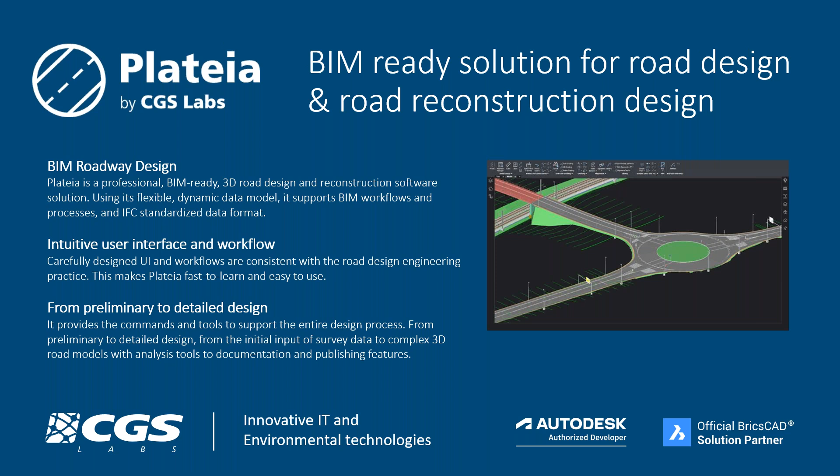If we say a few words about Plateia, which will be the focus of today's webinar, Plateia is a BIM-ready software, which means that you can add all the data you need to the design 3D model of the road, and then exchange this model using IFC data with other software in your BIM workflow. Plateia has a very intuitive user interface that is based on the established design process. And you can, as mentioned, use the software for any kind of road projects, no matter the type or size of the project.

There are several advantages of the software. Maybe let's just emphasize a few. It's a complete tool for the design, so you can design the geometry, you can do the analysis, and you can prepare all the documentation. It supports localized standards, as mentioned, and it has an established design approach, which is very common in civil engineering. So civil engineers are very fast to learn how to use Plateia.

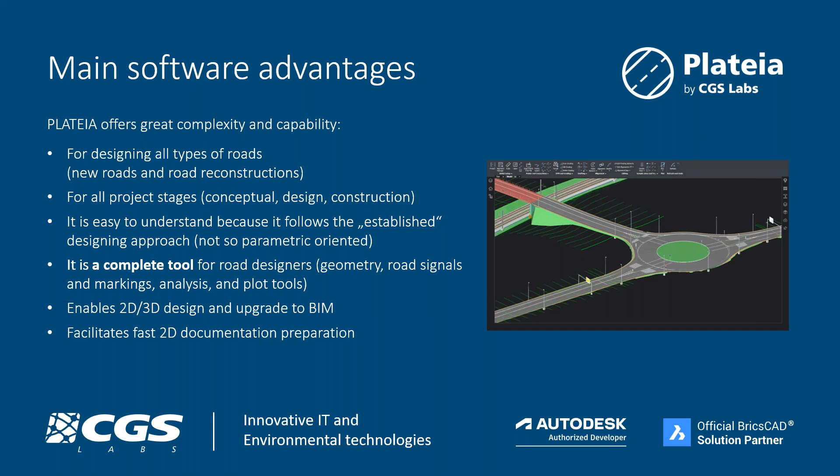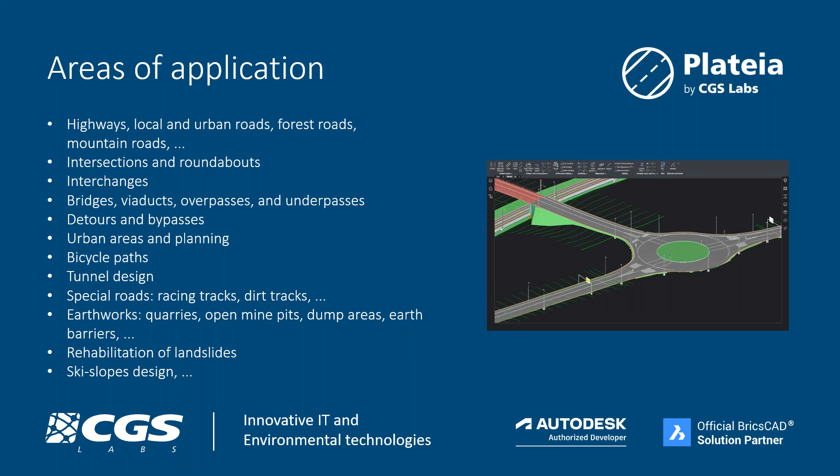It enables 2D and 3D design and also supports BIM workflows and BIM approaches, which are now used more and more in engineering practice. If we go further, you can see that areas of application of Plateia are very diverse. But today we will focus mainly on the design of intersections through the BIM perspective.

And who are the users? As mentioned, road designers are the main focus group, but Plateia is also used by surveyors who prepare the data for the designers, and also by contractors who monitor the designs and are actually involved in the construction of the actual projects.

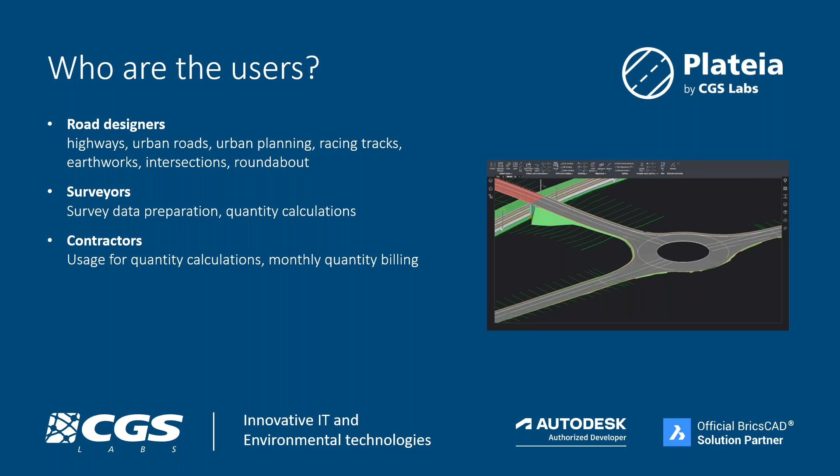So now I would like to hand over the floor to my experienced colleague Petra Tihole, who will show you how to design intersections with BIM in practice. Please, Petra, take over.

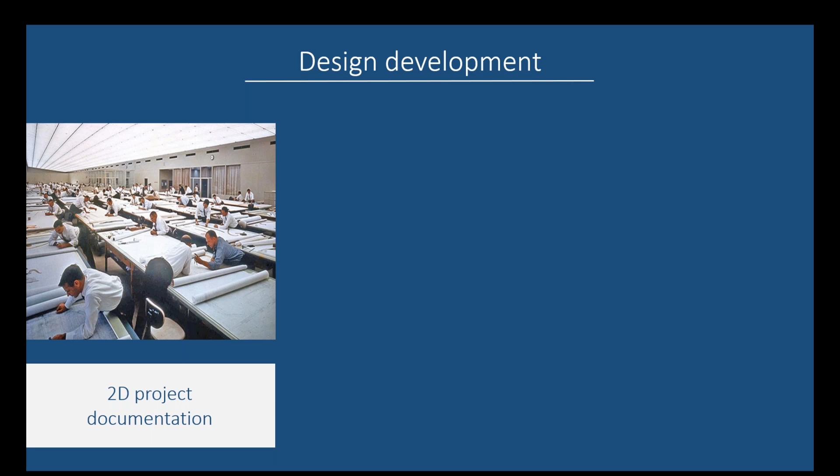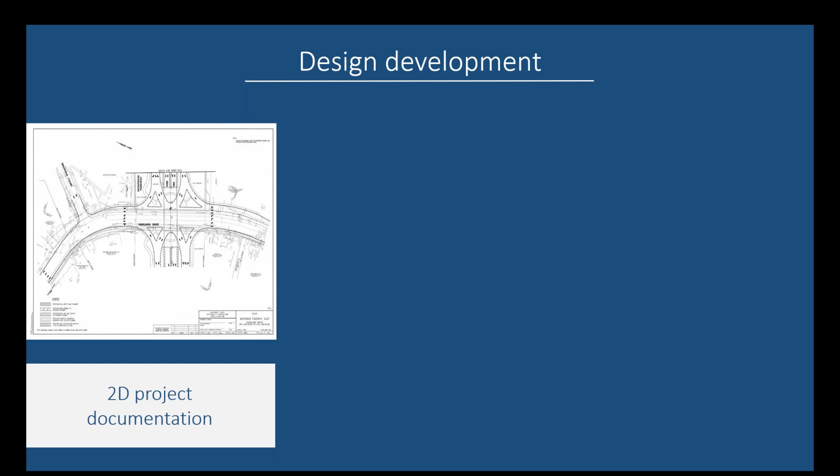Based on such cases, the idea of developing road designing software was born. The team of developers started with the aim to transfer the classic design concept from paper to computer using basic geometric elements such as lines, arcs, and circles. Such a 2D computer-aided design made it possible to significantly simplify and speed up the planning of infrastructure facilities. Later, due to the desire for even more efficient design, 3D modeling began to develop. It enables us to have a better overview of the model, which reduces the possibility of errors compared to the classic drawing of 2D plans.

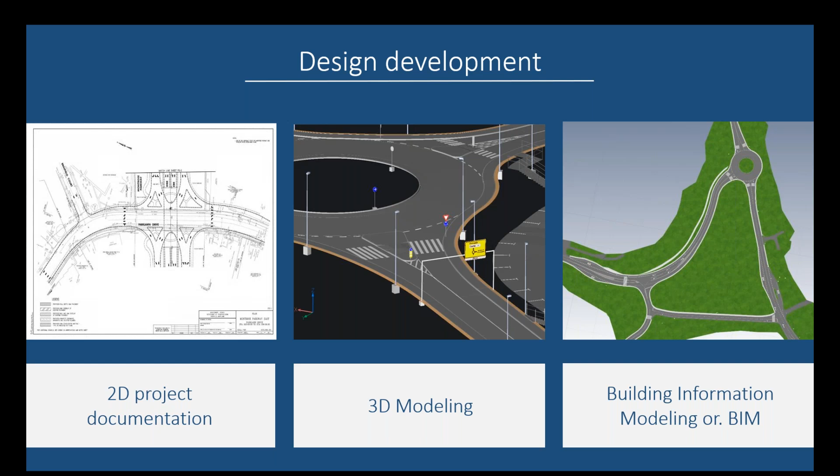In recent years, building information modeling has become established as the most successful design approach. BIM is the design concept that is no longer based only on the geometry of the models, but also on the information attached to the elements. So information is the key component that separates a BIM model from a 3D model, as it brings many advantages compared to classical design. It is getting more and more attention internationally.

CGS Labs software has enabled BIM planning for several years now. The biggest advantage of using Plateia for BIM projects is that the BIM approach is very similar to the classical design. In addition, the tools are very simple to use as the user interface is designed very carefully. This means that you don't need to learn a lot of new things and still quickly upgrade your plans into BIM models. The next advantage of using our software is the creation and editing of cross sections. In addition to many features for drawing typical cross-section elements of the road, Plateia also enables you to draw custom elements which you can planimetrify and draw as a 3D model.

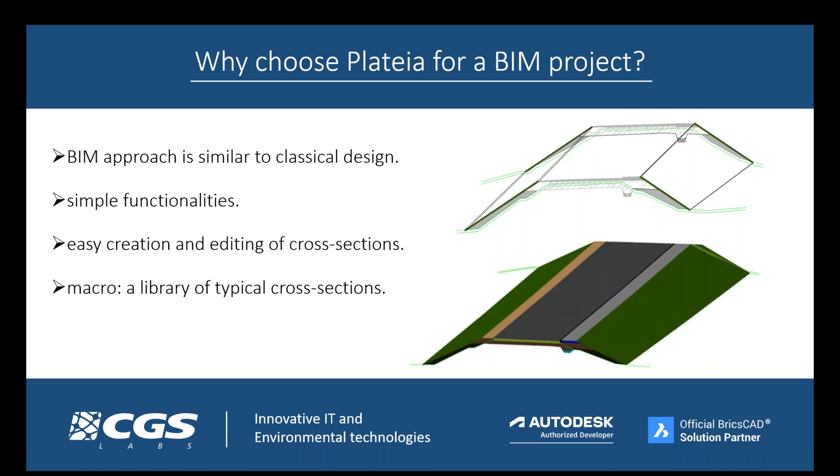So let's see what's meant by that. Plateia creates a 3D model by connecting planimetric quantities between individual cross sections. So each road element that you want to draw as a 3D solid must be drawn as a planimetric quantity in cross sections. This means that with features from the cross-section tab, you can draw and planimetrify a custom complex shape, which can then be drawn as a 3D solid. And you are not limited by typical elements from libraries as you are in other programs. Speaking of cross sections, I would also like to mention our macro. This tool allows you to save any cross section to a library and reuse it on another project.

And when it comes to special functionalities for BIM projects, we must highlight the collision detection tool. With standard programs, you usually have to export IFC first and then check for collisions in some other environment, while in Plateia, you can do this directly within the software. And when collaborating with other experts in demanding projects, tools for attaching attributes and IFC export and import will back you up without limitations. For all these reasons, Plateia is popular among civil engineers that work on BIM projects.

To further improve the BIM approach, we often set up demo projects to test the capabilities of the Plateia and Ferrovia software. On the basis of these projects, we can search for improvement possibilities based on the upgrade of the existing ones and on the development of new functionalities. At all times, our focus is to maintain the designing process as it is, simple and clear, as we want to avoid any unnecessary stress.

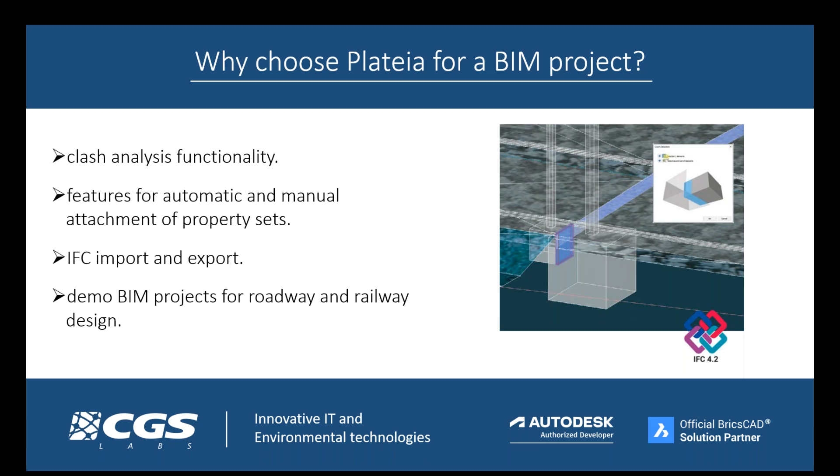Through 5 key steps, I will teach you today how to create a BIM model of an intersection and show you how to create 3D models of islands and traffic signaling. Finally, I will explain the advantages of exporting a model to IFC and what you should pay attention to when

designing a roundabout. In doing so, I will use the existing commands and I will also include some new functionalities that we have developed in the last year. This can help you work even faster and have more options available. I will also show you how to attach property sets of attributes to elements, and what is important when defining them so that you can then correctly connect the models to the quantity takeoff.

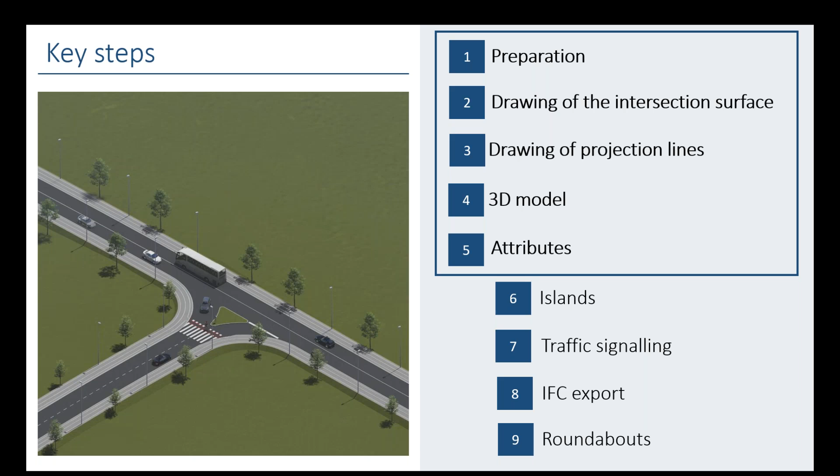Now let's start with the design of a three-way BIM intersection. The first step of creating an intersection is preparation. By that, I mean inserting terrain, creating two alignments that intersect, defining sample lines, drawing a profile, and calculating superelevation. This step is always the same, no matter if you are creating 2D plans or a BIM model.

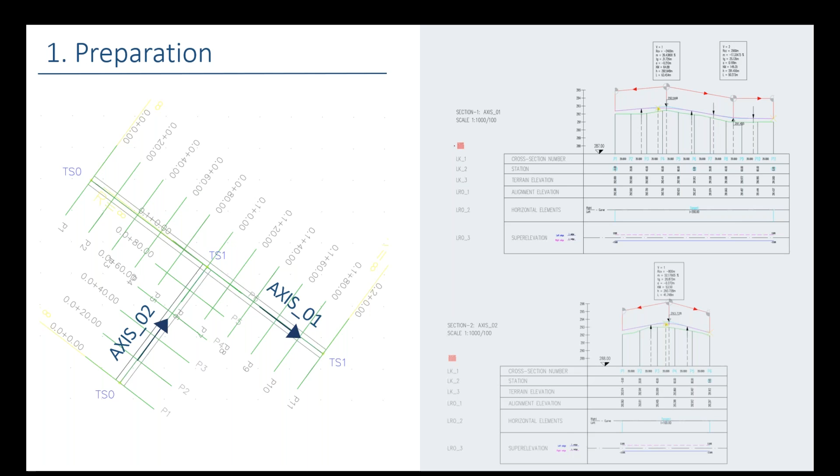In this example, the major alignment is axis 1 and runs in this direction, while axis 2 represents the minor alignment. After that, we move to the second step, which is creating an intersection surface. We do this with a dedicated tool found in the Traffic tab.

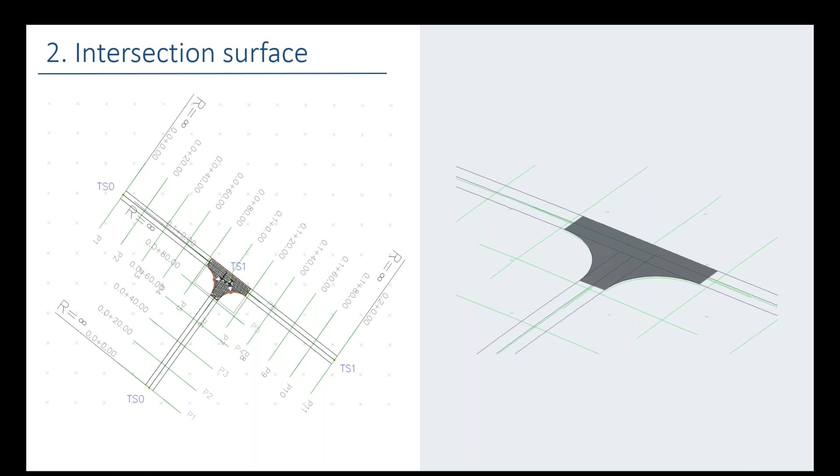This functionality significantly accelerates the intersection design process with automatic adjustments of the slope and superelevation of the minor alignment according to the major alignment. Besides, the alignments of the fillets and their longitudinal profiles are drawn automatically. Okay, to run the command, click on the Traffic tab and then double-click on the intersection.

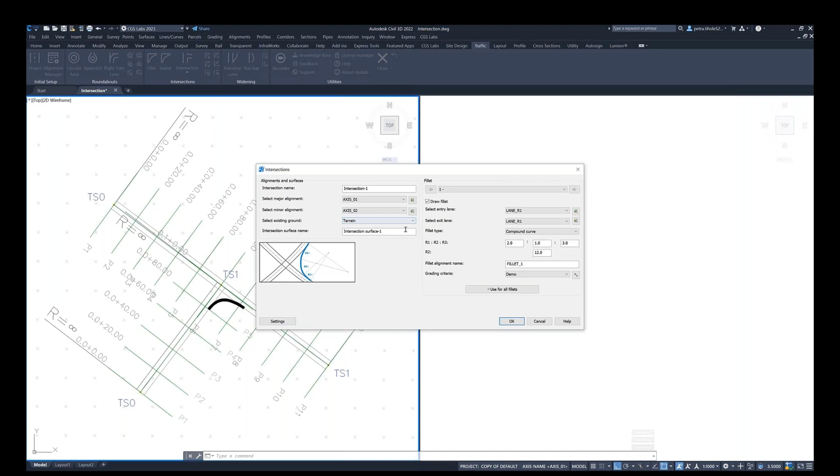First, define the parameters in the left part of the dialog box. Type the name of the intersection and then select major and minor alignment from the drop-down menu. Then select the existing ground, the existing terrain, and define the intersection surface name. After that, specify parameters for individual fillets.

This tool always offers to draw 4 fillets. Since we want to create a three-way intersection in our case, we will exclude 2 of them. We can also help ourselves with a sketch. If the fillet is possible, the software automatically shows it in the layout. So let's define the parameters of the right fillet.

First, check whether the software set the right entry and exit lane. In this case, everything is okay. Otherwise, we would select different lanes from the drop-down menu or directly in the drawing. Then select the fillet type. The user has 3 options. We will select the arc option and we will define the radius.

After that, we have to define the fillet alignment name. In this example, we will name it after the side. However, for larger projects, be careful to name the fillets in a meaningful way because it will be easier for you. After that, you select the grading criteria and then press the arrow to move to the next fillet.

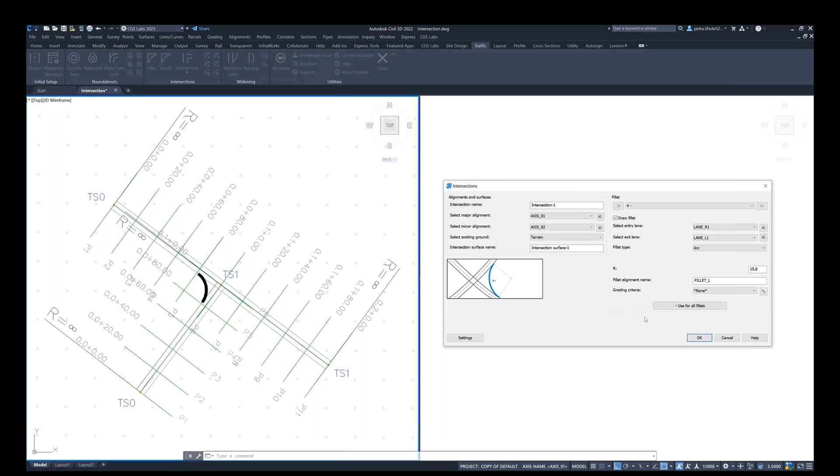This fillet doesn't exist, so we uncheck the draw fillet box, and we do the same for the third fillet and move to the last one. We check the entry and exit lane again, and then we select the fillet type. Okay. Then we define the radius, define the name and select the grading criteria. Okay, then we click on the settings button.

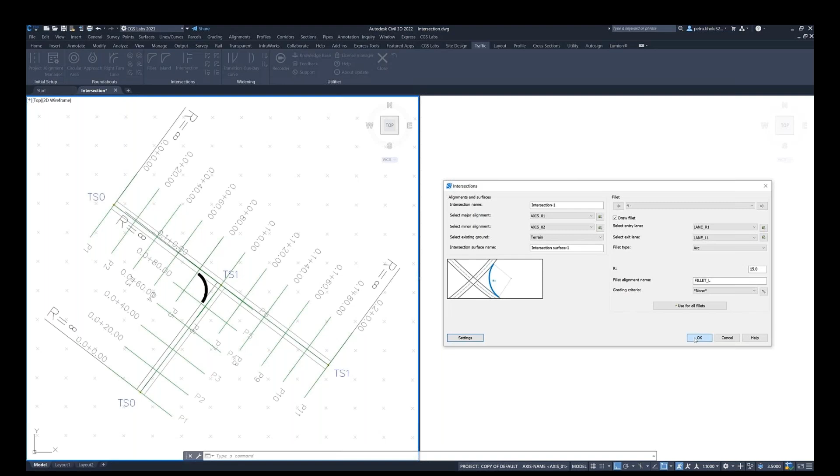In this dialog box, you can define some additional settings for fillets, for vertical alignment and superelevation on the minor alignment. In this example, I will leave default values and then I will select a surface type. Select CGS DTM and then check the triangles box and uncheck the boundary option. Press OK and then click somewhere on the drawing to define the insertion point.

Plateia automatically draws the surface and profiles. It has also changed the profile of the minor alignment. If necessary, the profiles can also be edited manually at this point, and then the surface of the intersection can be refreshed with the refresh intersection command.

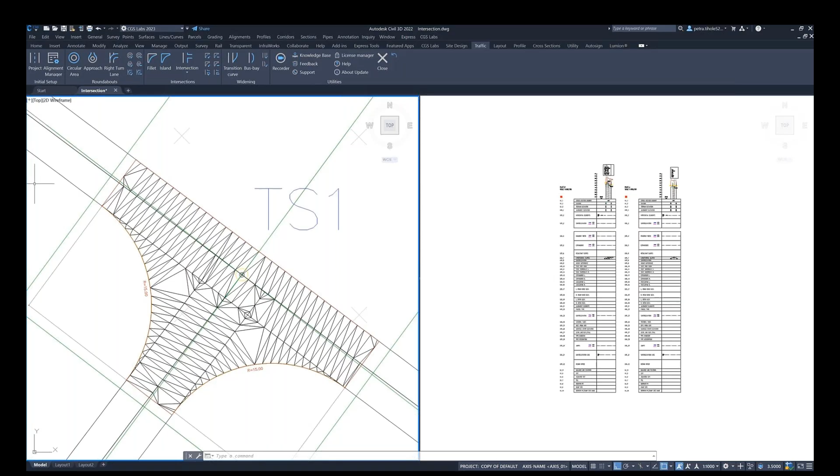After you have finished creating the intersection surface, you continue with defining projection lines. To be able to define these lines, however, you must first decide how you will create the intersection model. This means dividing the intersection into meaningful parts. The BIM model of the blue and purple part will be created on the basis of fillets that were automatically created in the previous step.

Those 3 yellow parts will be created based on the cross sections for axis 1 and pink parts on the cross sections for axis 2. Now let's focus on the blue part.

When we used the intersection surface command, we got the left fillet alignment, which is highlighted in red in the right image. The height of the left edge, marked in blue, will be obtained in the next step with a 2D projection onto the surface. This newly created 3D polyline will then be inserted into the cross sections, and by connecting the fillet axis and the 3D polyline of the left edge, we will get a top surface of the pavement.

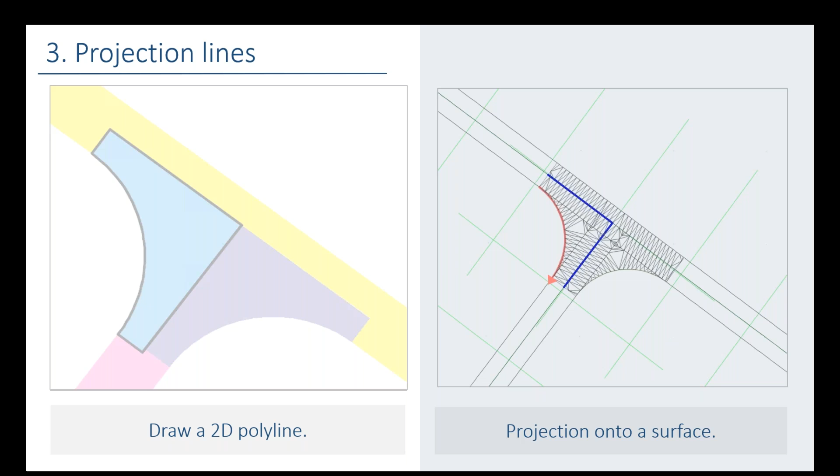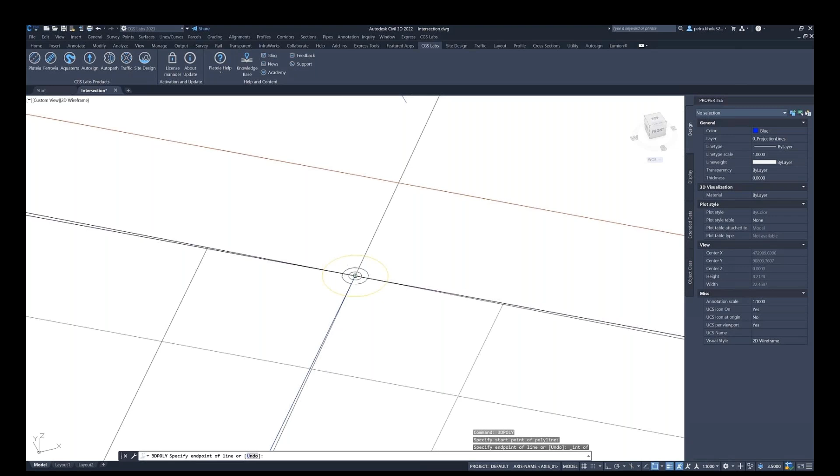Okay, to make it easier for you to understand, let's move to the drawing. First, we draw a polyline at elevation 0. And after that, we will select this polyline and we will run the polyline editor command, which is a new tool that allows you to project a line onto a surface. So I created a polyline. I will now select it and run the polyline editor command.

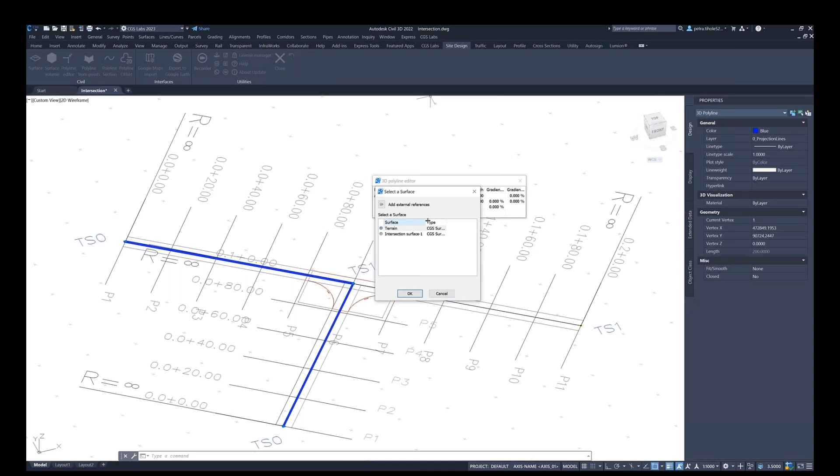Okay, now I select a 3D polyline in this dialog box and select the option raise to surface elevation. Now be careful that you select the intersection surface and not the terrain. You can now notice that a new 3D polyline is now inserted in the drawing. Then you have to define this polyline as a projection line because that's the only way to insert it in cross sections.

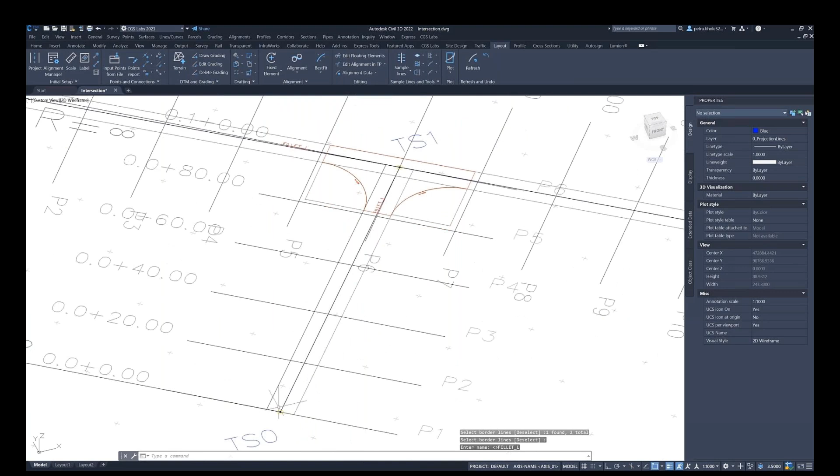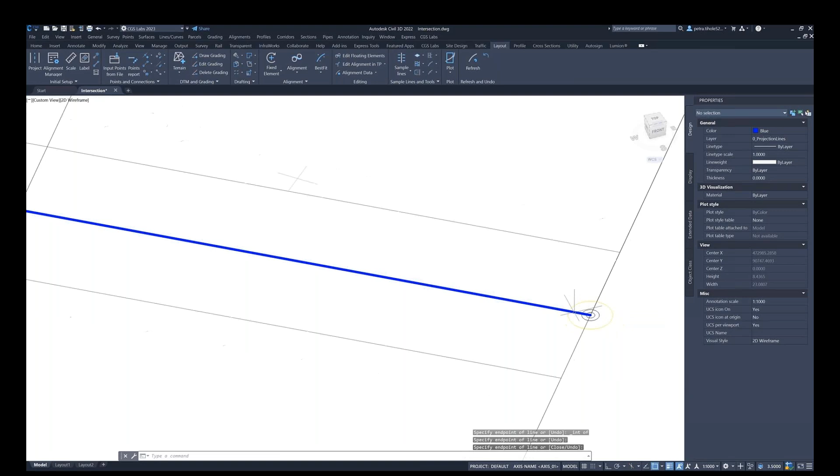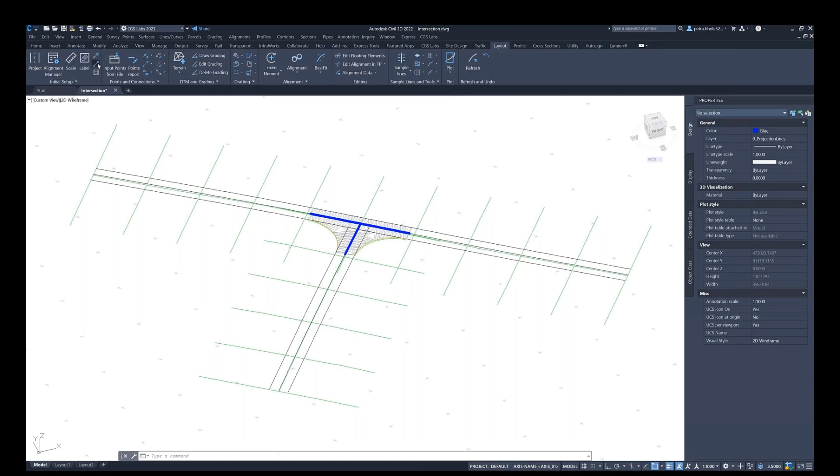Okay, and after that, we repeat the same procedure for the right fillet. So we draw another polyline. Be careful that you draw this polyline at elevation 0. Okay, then I select this polyline and run the polyline editor again and project this 2D polyline to the intersection surface. After that, we shouldn't forget to define this 3D polyline as a projection line.

Now, you can start by drawing a 3D model of fillets. First, define one randomly wide traffic lane for the left fillet. The only reason you need to do this is that the roadway will be inserted in the cross sections. Without the roadway, you cannot see the axis height in the Plateia's cross sections.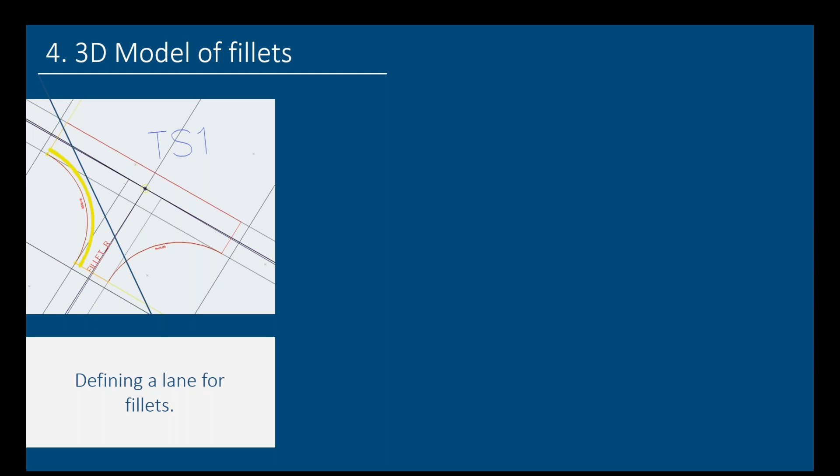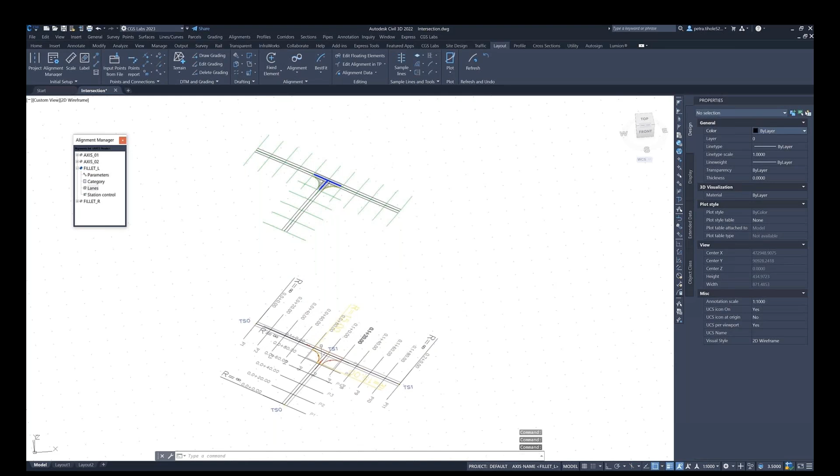So you run the alignment manager, then double click on the left fillet to make it an active alignment, and then double click on the lanes. Click on the add and define the label and the width. Okay, after that, you have to refresh the layout. So you have to run the calculate expansions and draw lanes command. Press OK, and you can see that a new traffic lane is now inserted in the drawing.

Then you draw sample lines a distance of 1 meter and one additional sample line at the intersection between the major and minor alignment. This additional sample line will allow you to draw the 3D model perfectly over the entire area of the intersection. Otherwise, there will be a small gap in the middle of the intersection.

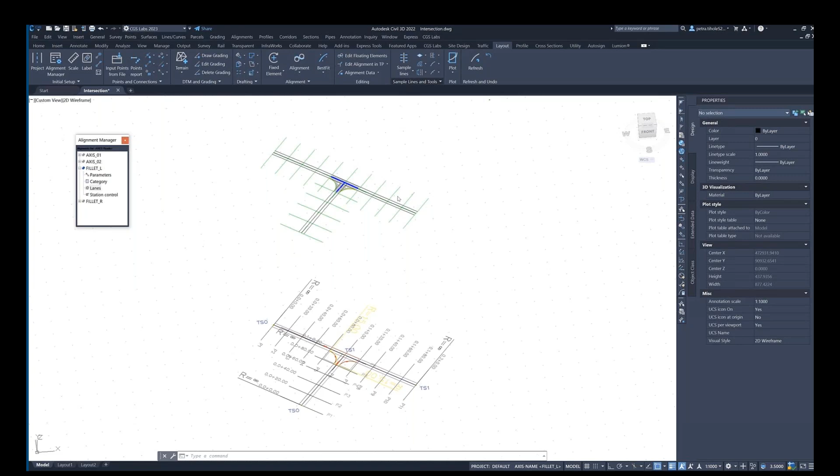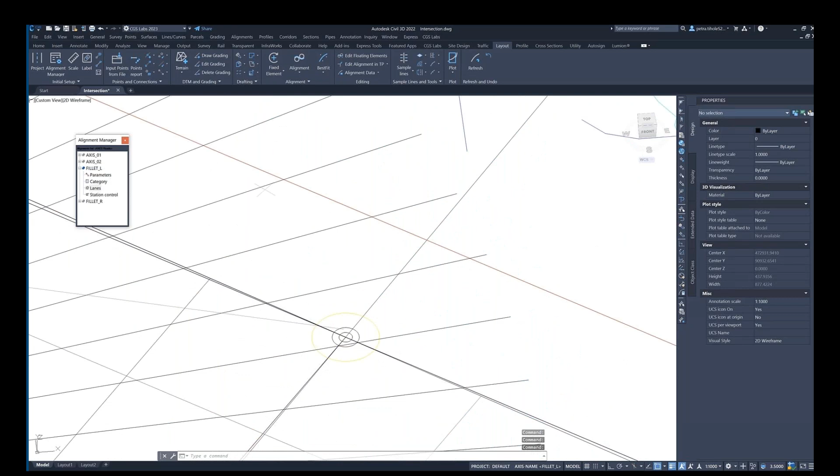So you run the draw sample lines command. Define the distance between cross axes and width left and right. Press OK. And then run the sample lines through points command. Click on the icon next to the station, and then click on the intersection between the major and minor alignment.

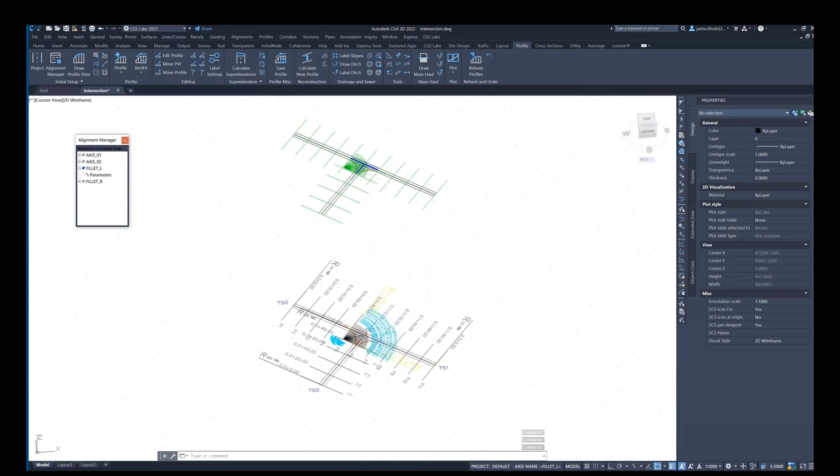Then you have to refresh the longitudinal profile. So go to the Profile tab, click the Refresh Profiles, and now those sample lines will be shown in the profile. Now you can start creating cross sections, which are the basis for creating a 3D model. You run a draw cross section view. Then you check the parameters and press OK.

If I zoom in the first profile, you can see a drawn traffic lane, which I have defined in the alignment manager in one of the previous steps. In order to get the top edge of the roadway pavement, we have to first insert the previously defined projection line. Okay, and now you click on the line command and connect. Okay, and now we will connect the right edge of this lane with the projection point.

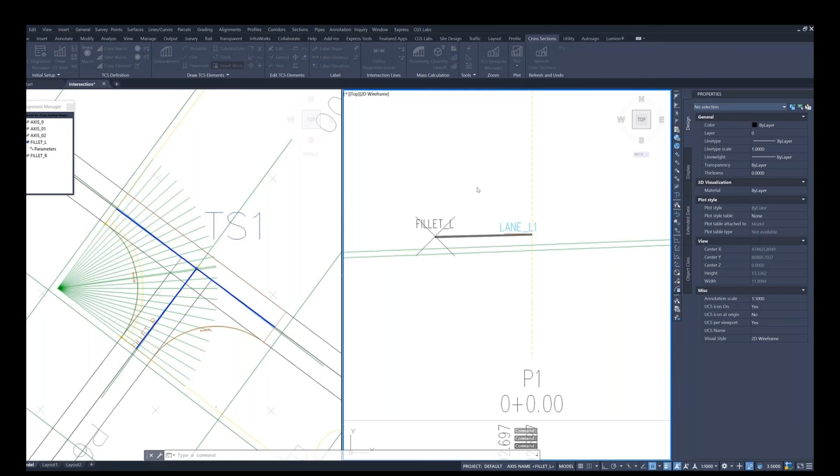This line now represents the top of the roadway pavement, and you can now continue drawing typical cross-section elements. I will start with the pavement, and then I will add the curb, sidewalk, bicycle lane, shoulder, and embankment. At this point, I would like to remind you once again that all elements must be planimetrified if you want to draw them as 3D models.

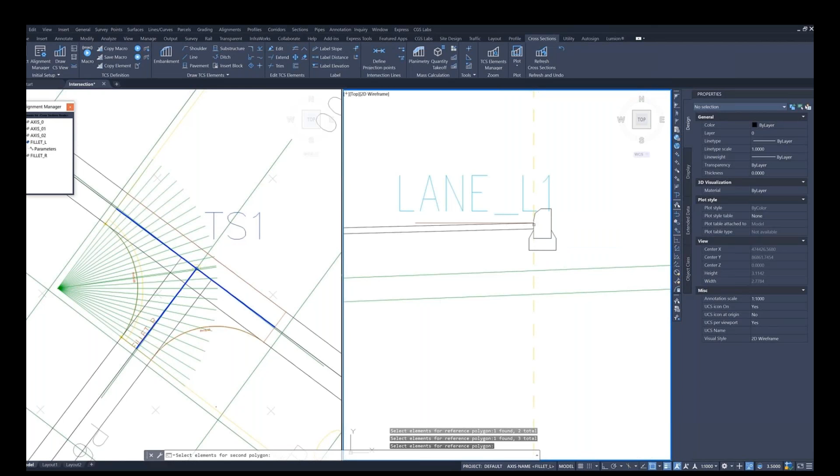Unfortunately, we don't have enough time today to draw each typical cross-section element together. So I have prepared a macro. To run it, you just simply click on the play macro and then select it from the list of macro definitions.

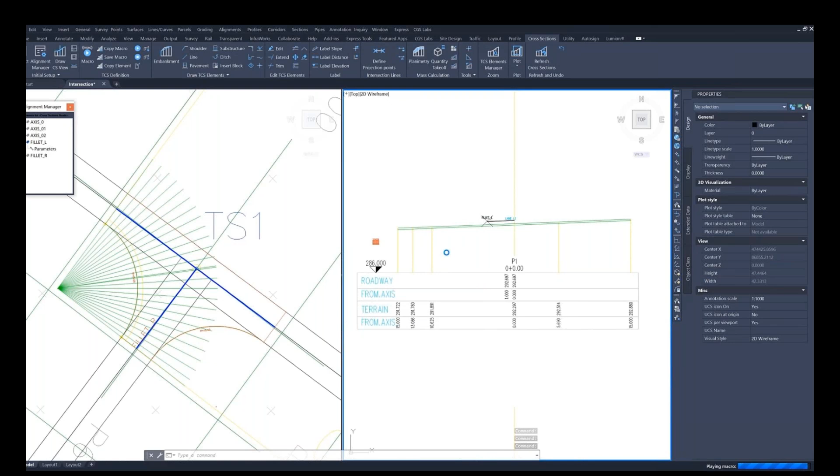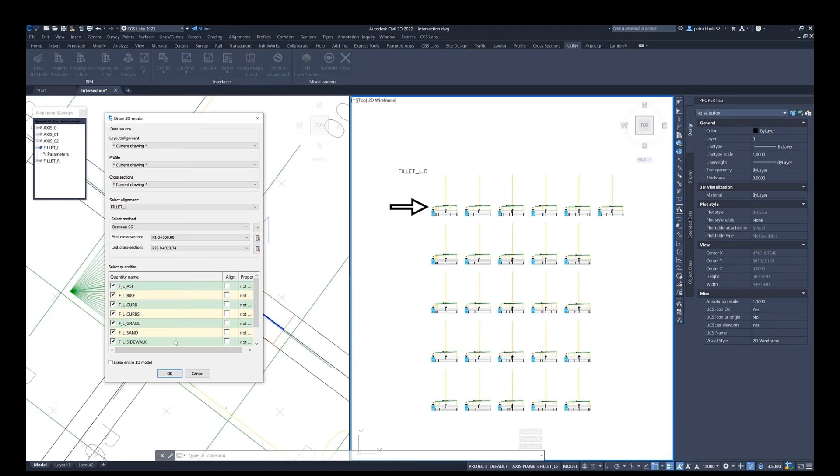Now that all my cross sections are complete, I can draw the 3D model. So I go to the Utility tab, click on the Draw 3D Model command, and then I specify which quantities should be drawn and confirm by pressing the OK button. Okay. You can now see that the 3D model of the left fillet is now complete.

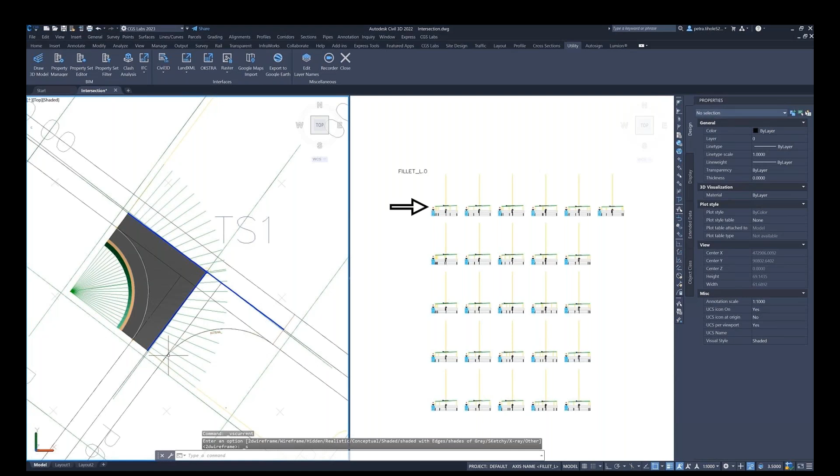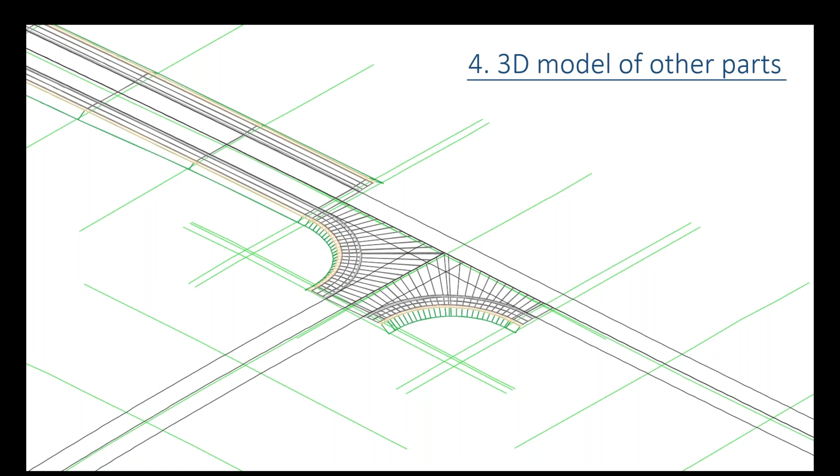Then you draw the 3D model of the right fillet in the same way, but for other parts of the intersection, you have less work because you don't need to insert projection lines since you already have all the road edges.

So now we created a 3D model, but if you want to create a BIM model, you need to attach metadata to the 3D models. In Plateia, property sets are defined in the property manager. The user has two options: automatic attributes, whose values are calculated and inserted automatically after drawing a model with the Draw 3D Model command, and attributes that are defined and attached manually. In addition, it has a tool for viewing and editing attribute values.

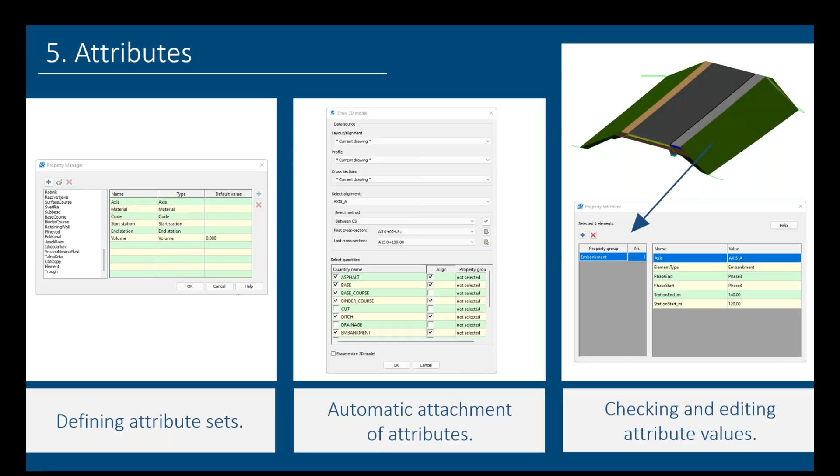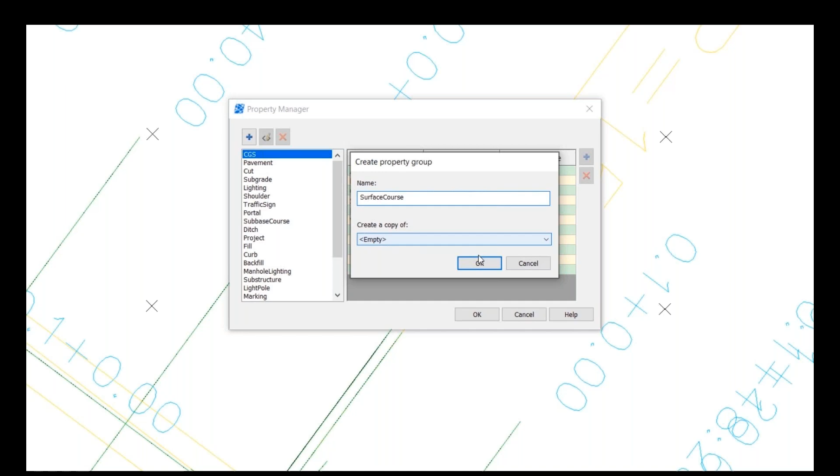So let's take a look at this process of editing property sets directly in an example. First, we need to define property sets in the property manager. To add a new property set, click on the plus button on the left and then define the name. Okay, I defined surface course for the name, and then I press OK. Afterwards, click on the plus button on the right to add attributes. Define a name and then select a property type.

If you choose the user-defined option, it means that you will have to enter the attribute values manually. We enter the default value in cases where we know that it will always be the same. In other cases, we prefer to enter it manually using the property set editor command. If you choose one of the other options for property type, the program will automatically insert the value of the attribute after we run the Draw 3D Model command. Information about which attributes you need to attach to an individual model or to an individual element can be found in the BIM execution plan.

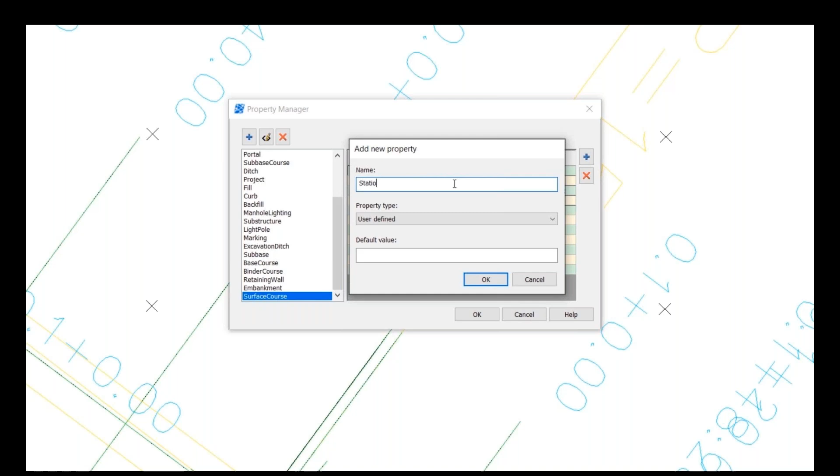So you can see that I clicked on the plus button, I defined the name, and this time I select a user-defined option for the property type, and I also defined a default value because this value will always be 5 centimeters. But if I want an attribute for start station, then I select the start station property type, and the software will automatically insert the value.

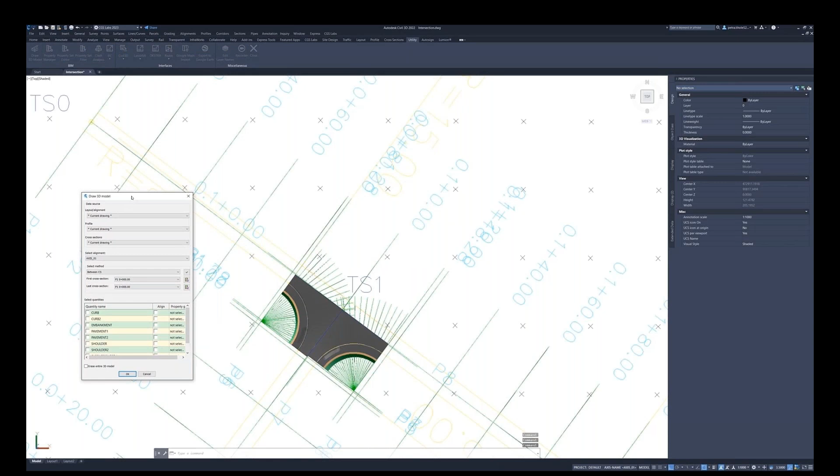Okay, once you have defined all the property sets and arranged the cross sections, you can create a BIM model. After running the Draw 3D Model command, you define the source data, then you select the alignment and select quantities. Okay, after selecting the method, then define the corresponding property set for each quantity. Okay, for example, this property set curb we defined in a previous step in the property manager.

Then you can also check the box at the Align option to connect the consecutive planimetry polygons along the alignment. Otherwise, it connects the adjacent planimetry polygons with sectional straight lines.

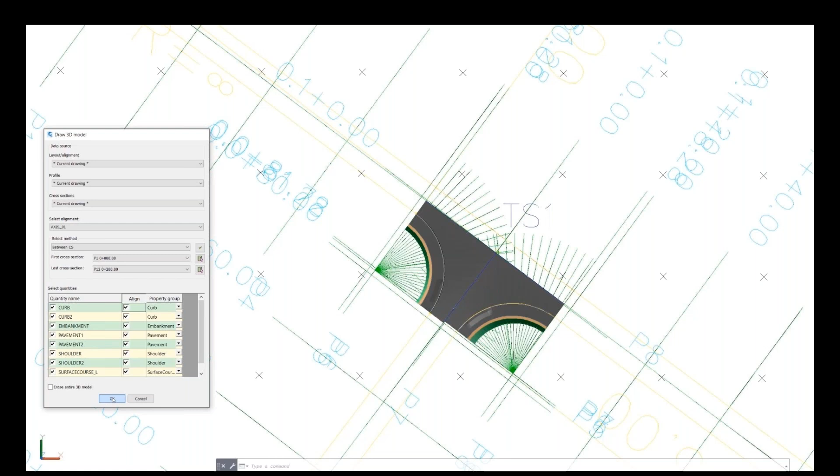With the help of the property set editor, you can check whether the property sets have really been attached to the model. So you select a model in the drawing, and then you see which property set is attached to this element, and you can also see the values of the attributes. With this tool, you can also add more property sets to one element. For example, a property set with project data.

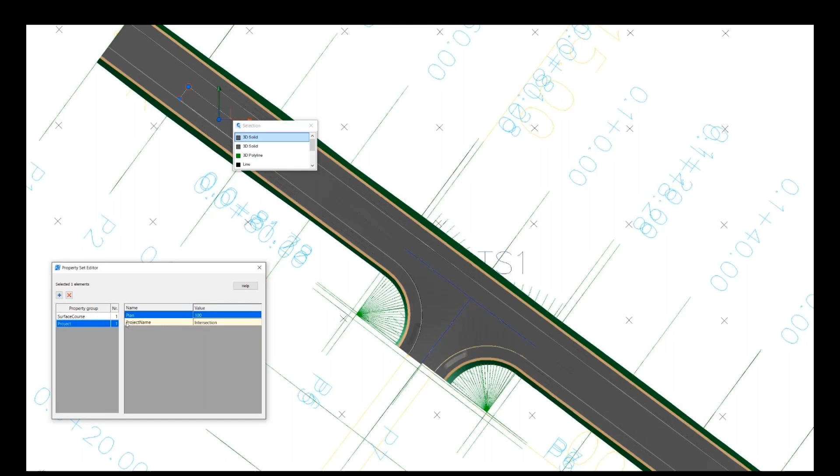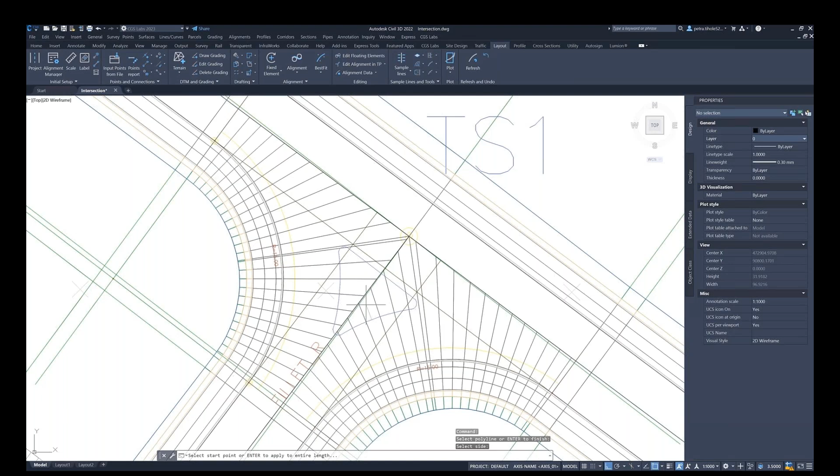Now let's take a look at creating the island. In the beginning, you have to draw a 2D polyline that represents the shape of the island. This polyline is created by using CAD commands and should be at 0 elevation. Next, use the grading tool to project this polyline to the intersection surface. And at the same time, additional 3D polylines will be created, which will represent the edges of the island curb.

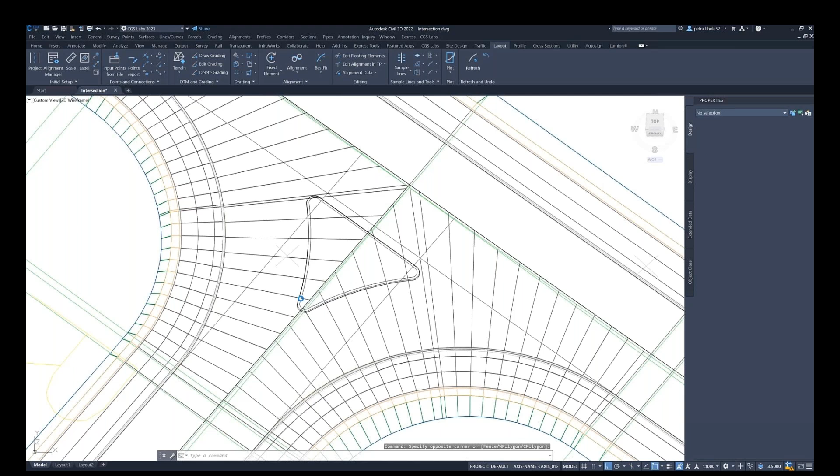Okay. After that, I will isolate those 3D polylines and I will create surfaces between them. To make those surfaces, run the make single surface command, select 3D polylines, and the surface between them is created. Then you repeat this procedure for all the polylines.

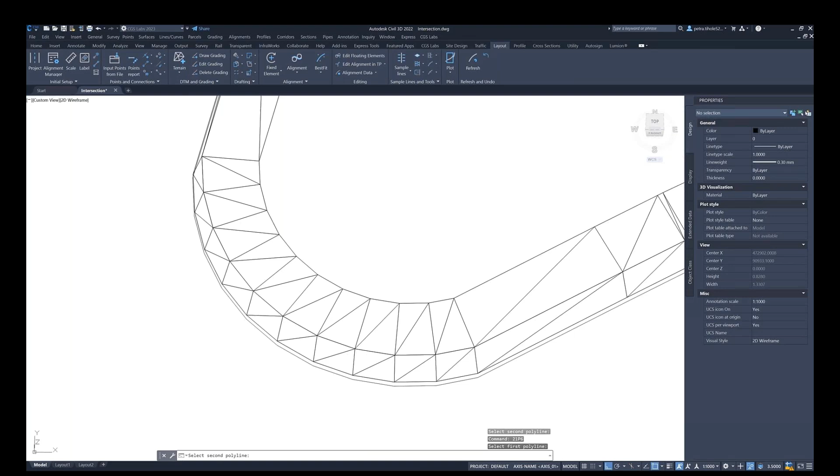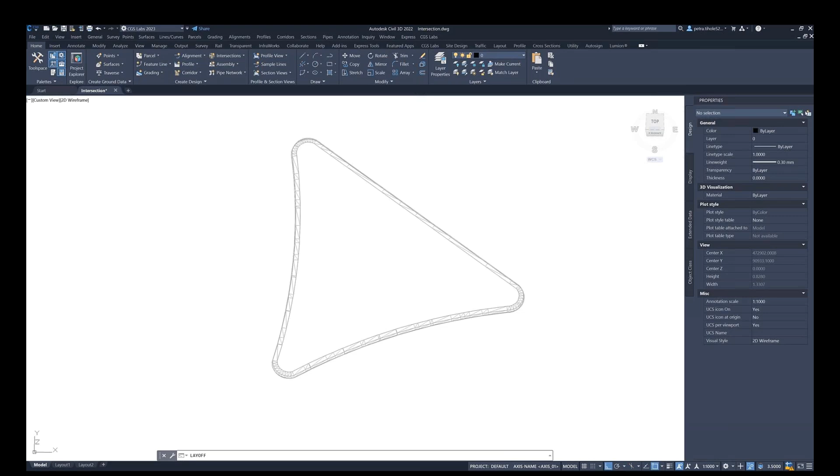And once you have connected all the 3D polylines that represent the curb, you can select all the 3D faces and assign them the same custom defined layer. Okay. Alternatively, you can draw the surface using the terrain tool. So this time I will hide other 3D polylines to make it easier to understand.

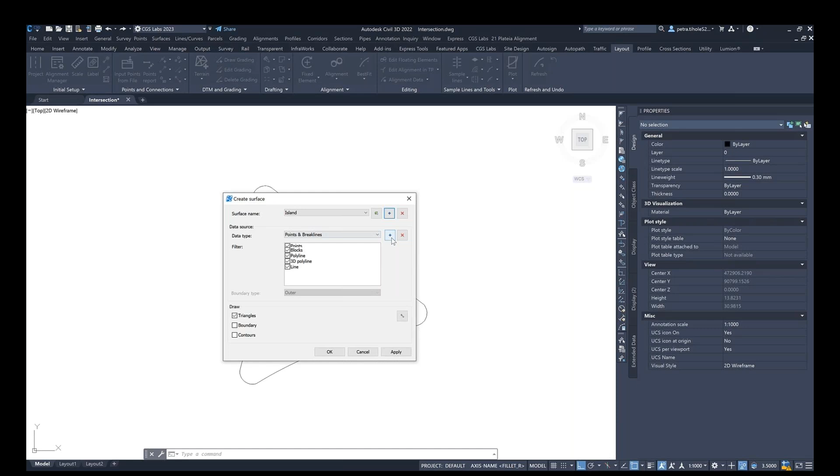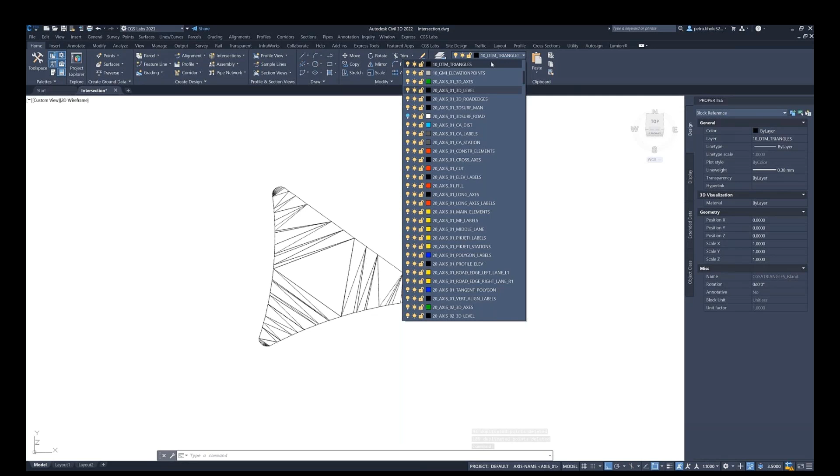I run the terrain command. Then I define a new surface. Okay, select a 3D polyline in the drawing, and then I will also select the boundary. At the end, you can also change the color of the layer to green. So this is the last step of creating an island.

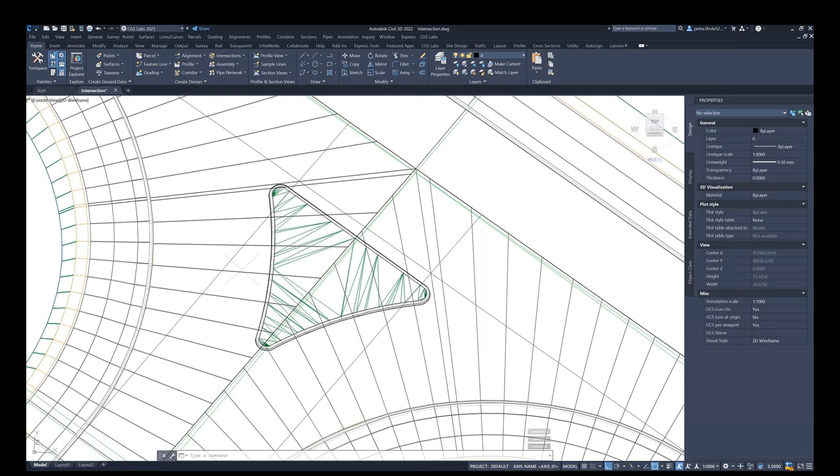Okay, we will also show the curve. Okay, and the island is completed. To make our model totally complete, we conclude with drawing a traffic signaling model. The fastest way to create it is in the AutoSign software.

AutoSign includes extensive libraries of traffic signs and road markings for individual countries, and at the same time offers tools for creating user-defined traffic signals, thus allowing the designer more freedom in designing. In addition, it allows us to convert 2D traffic signaling into 3D models with a single click, which gives AutoSign a great competitive advantage over other similar programs.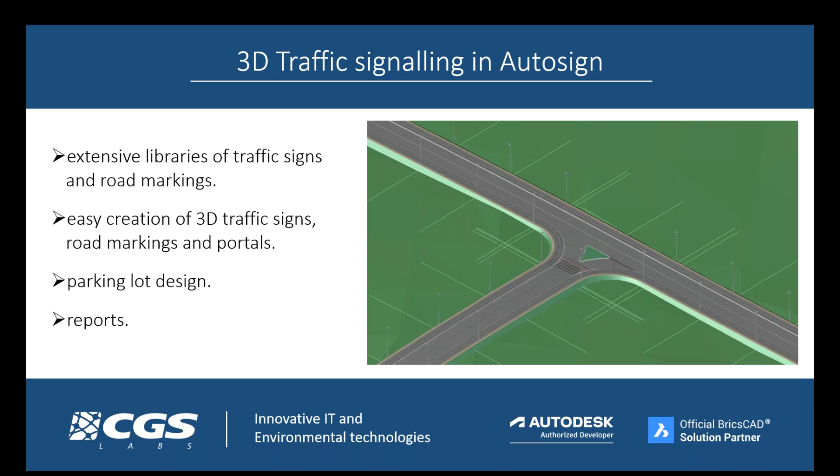And once we have created the entire model and equipped it with attributes, we can create different visualizations or construction simulations based on it. In order to be able to open the model from Plateia in other software solutions, we must first export it to IFC. I would like to ask you to quickly answer the question of whether you have ever exported models to IFC format. I think that the question should now appear on your screen.

Gregor, can you please share the results? Okay, thanks everyone. I see that there are still some of you who have not done this before. So I will quickly explain what IFC is. IFC is a standardized digital description for data interchange in the construction industry. This means that someone can work in program A, export the model to IFC, and then open it in program B.

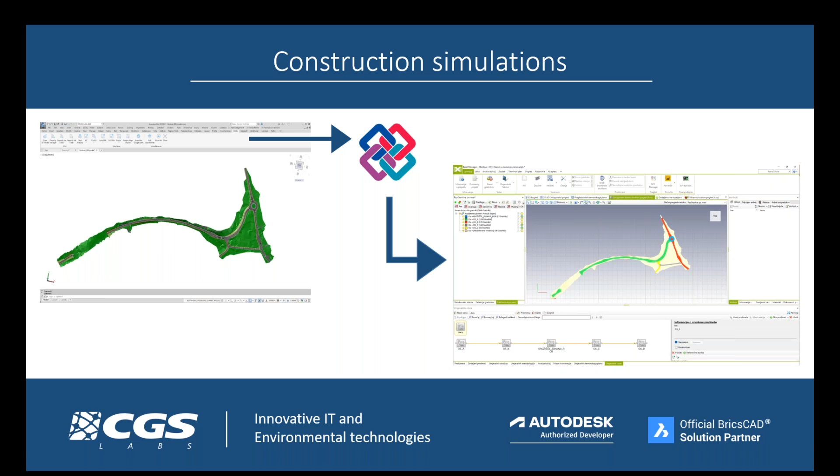On this slide, you can see the Plateia model in the BEXEL program, which is intended for project management. The next slide will show us an animation made in the Lumion program. In this case, however, we do not need to export the model to IFC as there is a plugin for AutoCAD and BricsCAD. In Lumion, we add materials to Plateia's models and get realistic renders very quickly.

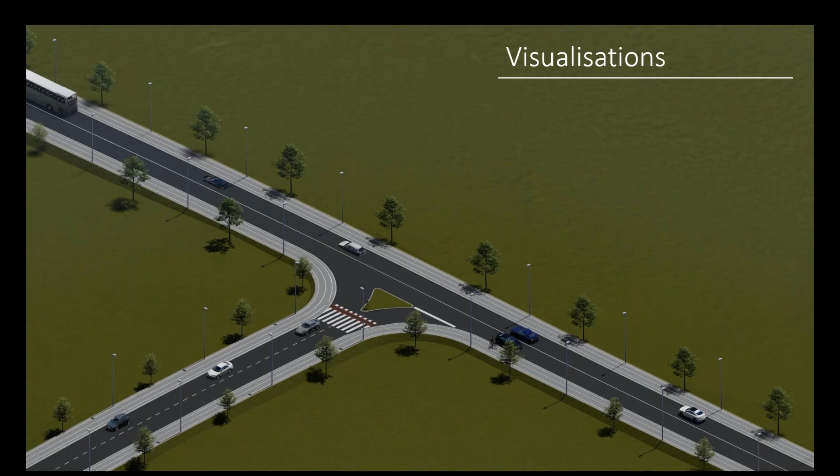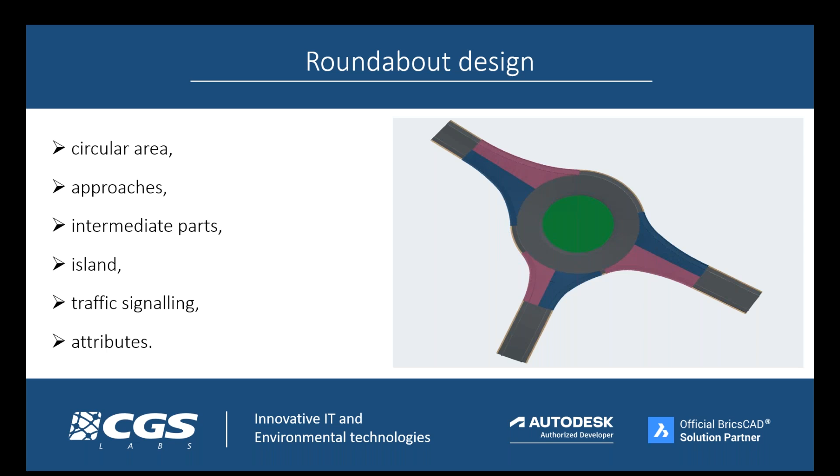Finally, let's take a quick look at roundabouts. When designing a BIM roundabout, we can use similar approaches as we have shown today in the example of an intersection. First, we make a model of the circular part. Then we continue with the approaches. And finally, we draw the intermediate parts. A detailed demonstration of designing a BIM roundabout model can be found in one of the following webinars, which will be held within 2 months.